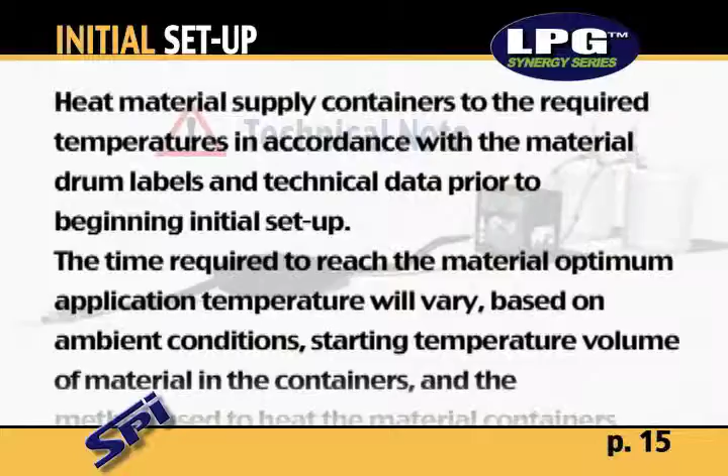Heat material supply containers to the required temperatures in accordance with the material drum labels and technical data prior to beginning initial setup. The time required to reach the material optimum application temperature will vary based on ambient conditions, starting temperature, volume of material in the containers, and the method used to heat the material containers.

In Chapter 2, we will cover: locate LPG unit, connect component transfer hoses, connect spray hose, connect lock and load spray gun, power application, bleed air from fluid system, purge spray hose.

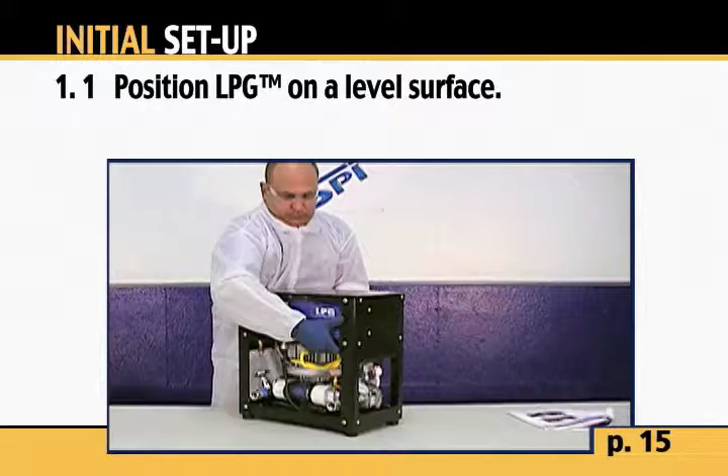Locate LPG unit. Position LPG on a level surface. Do not expose LPG to moisture.

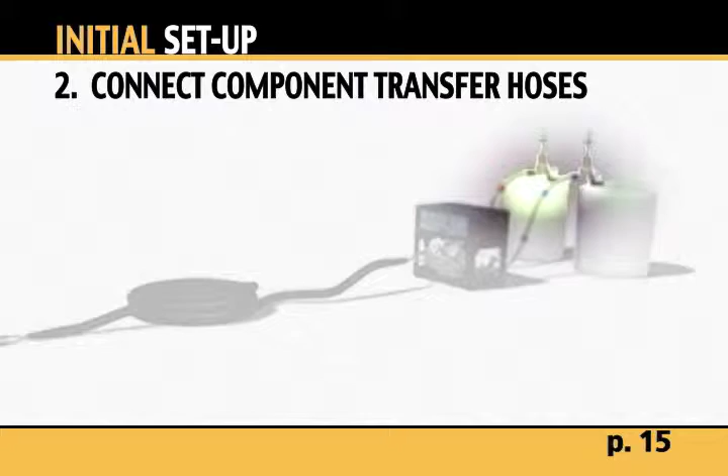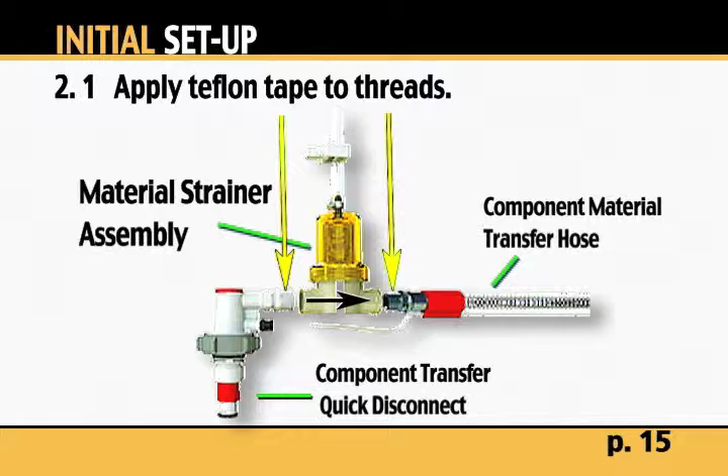Connect component transfer hoses. Apply Teflon tape to threads of material strainer assembly here and here. Ensure the flow direction arrow on material strainer assembly is pointing towards the proportioner.

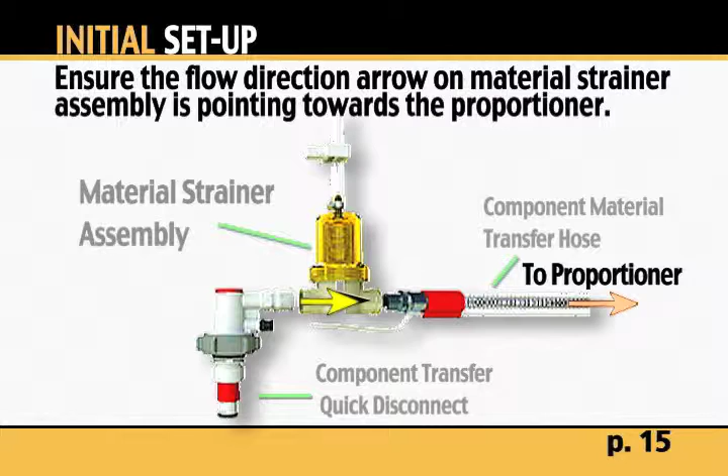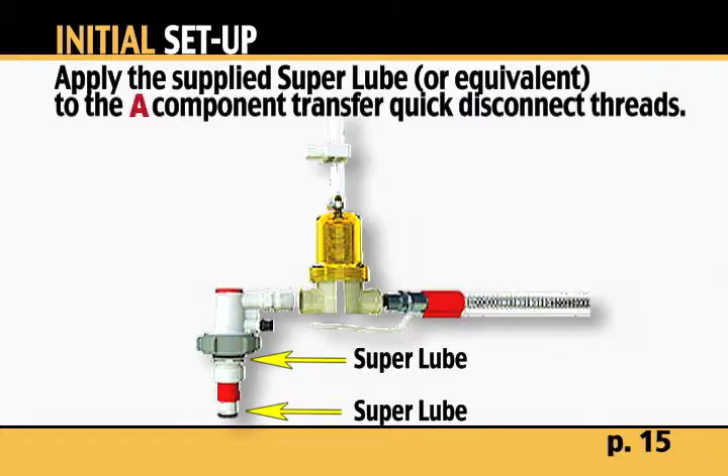Apply the supplied Super Lube or equivalent to the A component transfer quick disconnect threads here and here. Connect the A component material strainer assembly to the A component transfer hose and material drum transfer quick disconnect unit.

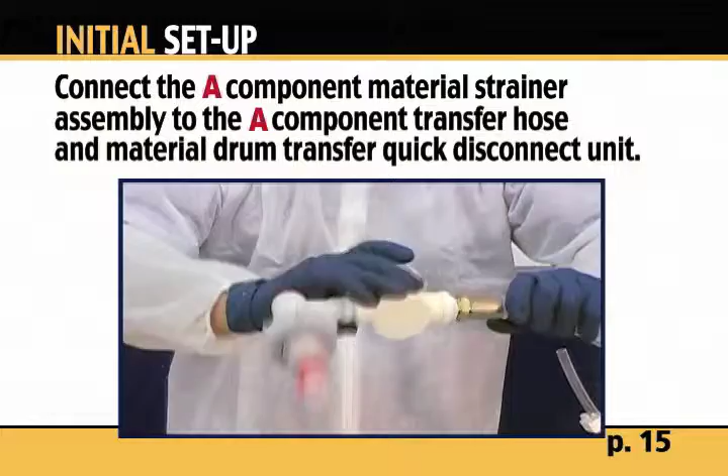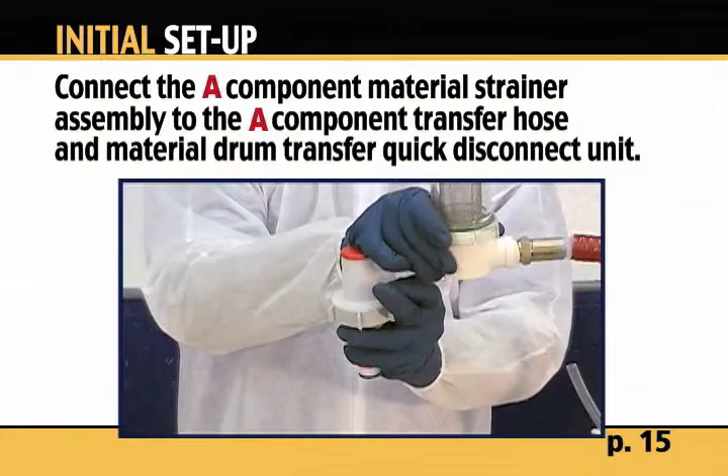Connect the A component transfer hose to the A component proportioning pump inlet fitting.

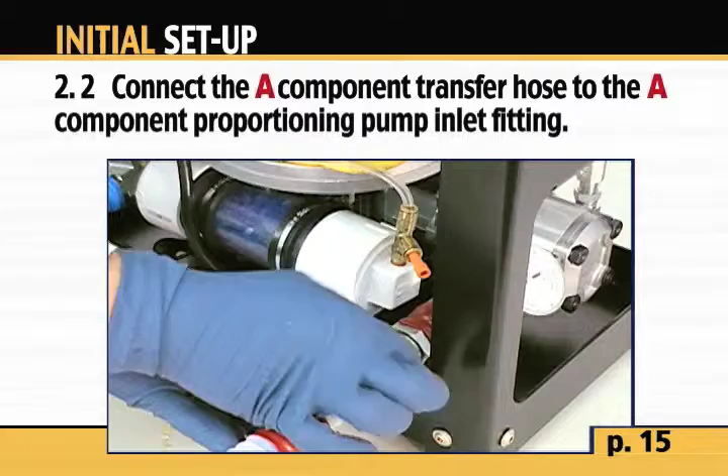Connect the A component air lines to air dryer outlets.

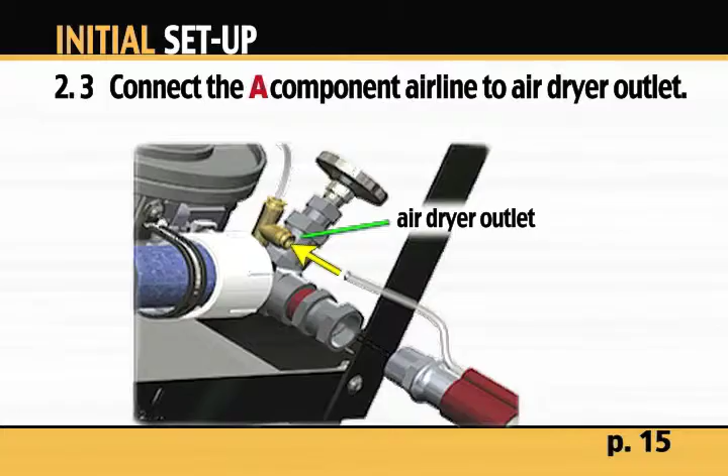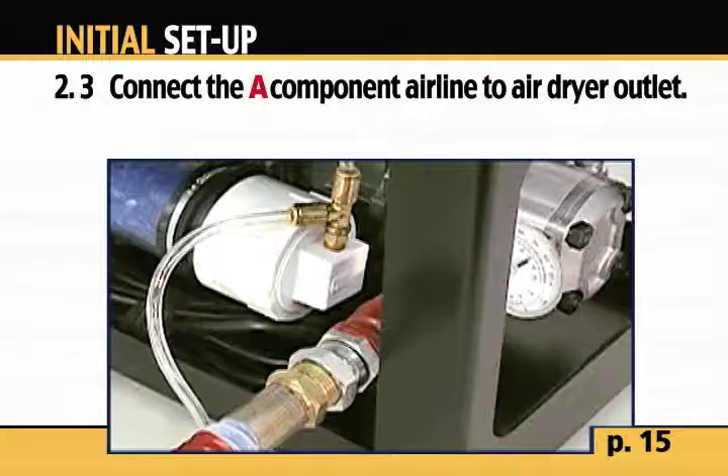Placement of the A and B component supply containers must not cause any sharp bends or excessive pressure on the component transfer hose assembly. The component transfer hose must be as straight as possible with a slight downward angle towards the LPG inlets.

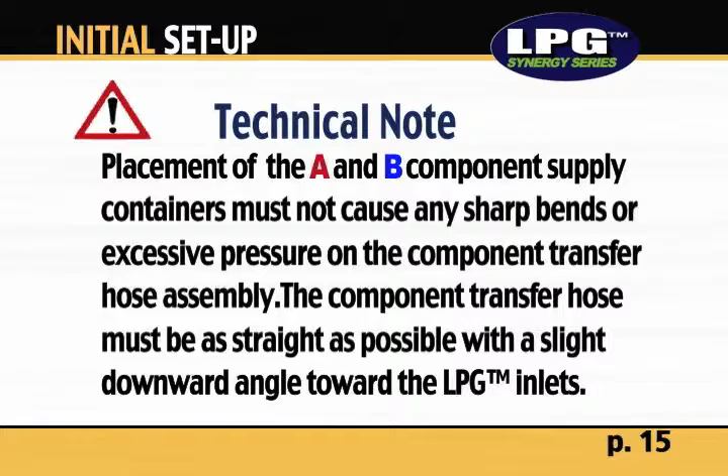Locate the A component container near the LPG A component transfer quick disconnect.

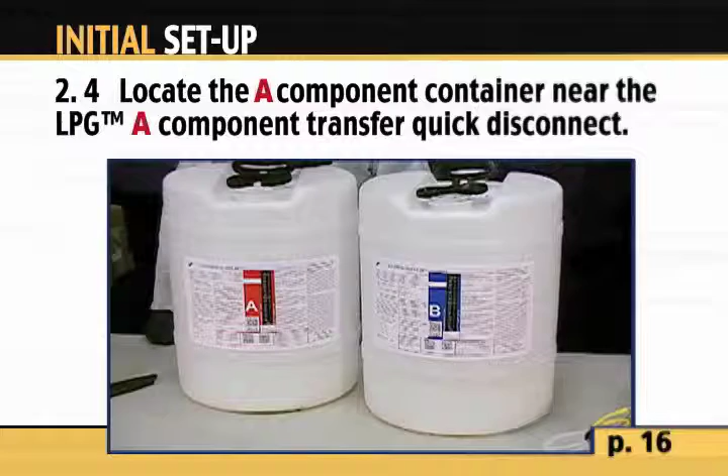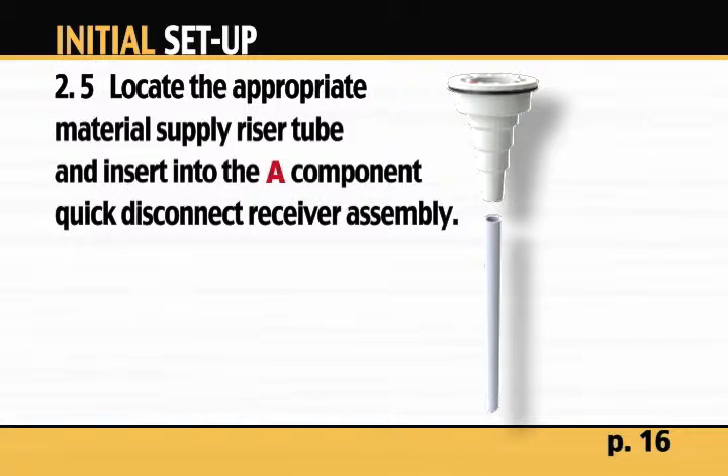Locate the appropriate material supply riser tube and insert into the A component quick disconnect receiver assembly. Install the supply riser tube that is the correct length, depending on which LPG container you will be using, 5, 15, or 55 gallons.

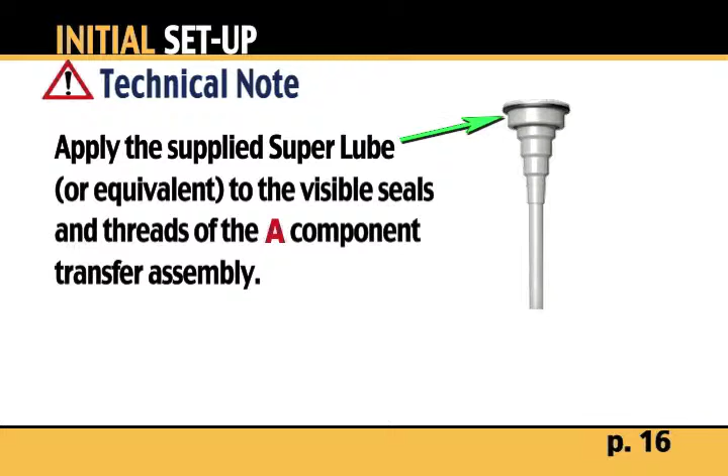Apply the supplied Super Lube or equivalent to the visible seals and threads of the A component transfer assembly. Insert the quick disconnect receiver riser tube assembly into the material container.

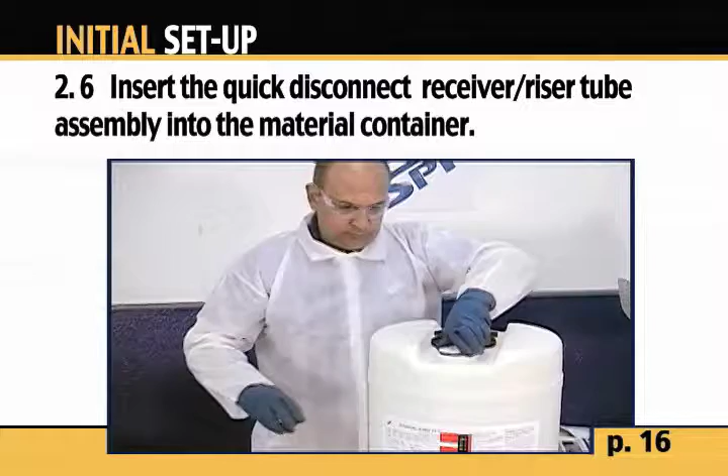Remove A component container storage plug.

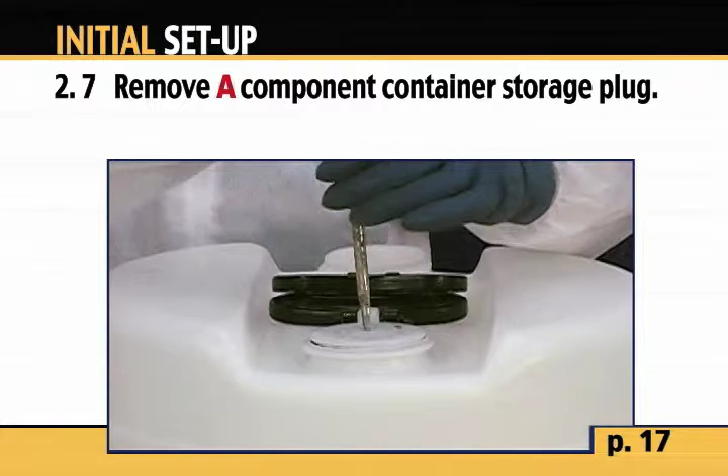The bottom of each LPG fluid strainer air trap must be positioned at a minimum of 4 inches above the top of the LPG proportioning pump inlet.

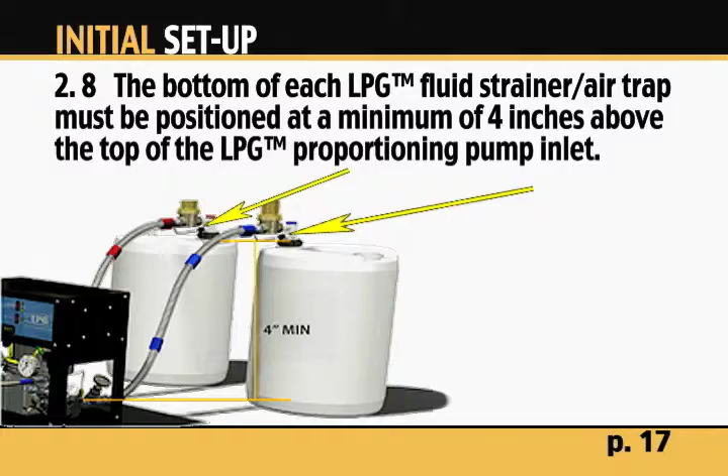Thread the A component transfer quick disconnect into the A component receiver assembly, aligning keys with keyways until the connector is hand tight.

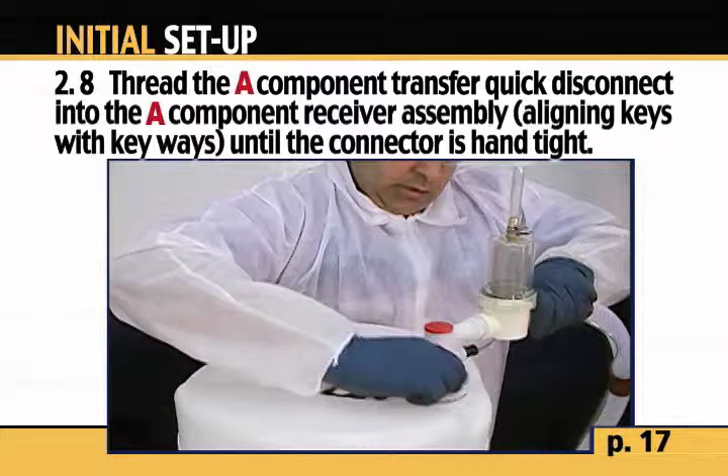Over-tightening the transfer quick disconnect can cause an air leak, which will not allow the transfer supply system to properly pressurize as designed.

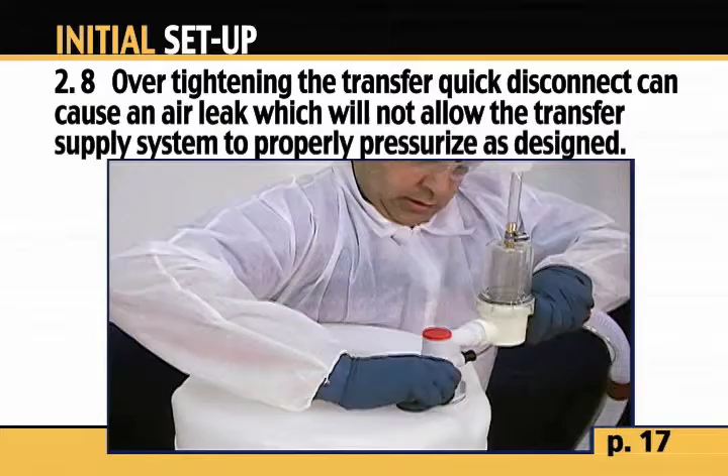Repeat steps 2.1 through 2.8 for the B component transfer hose assembly.

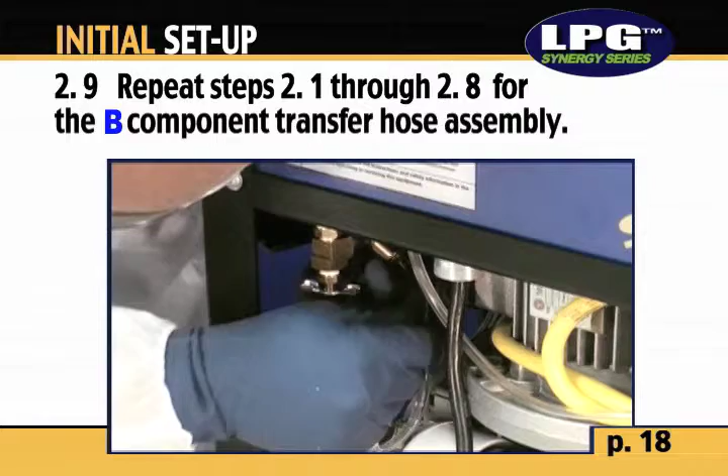Connect spray hose. Connect the A component pressure hose to A component proportioning pump outlet.

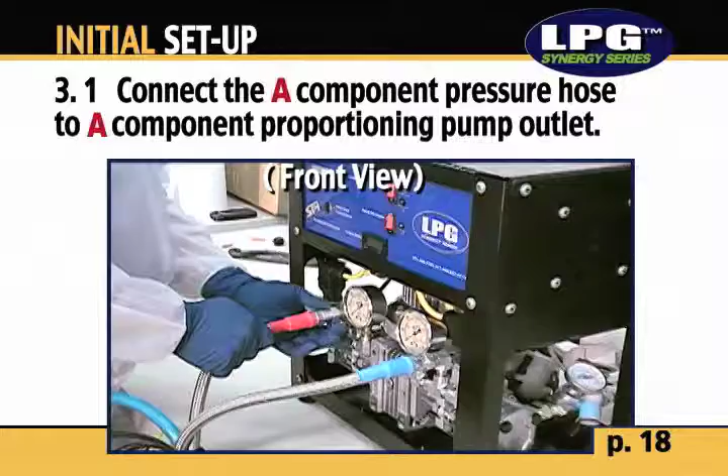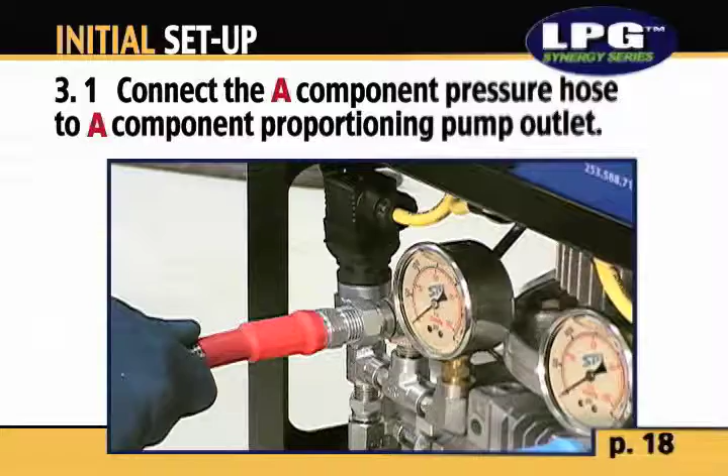Connect the B component pressure hose to the B component pump outlet.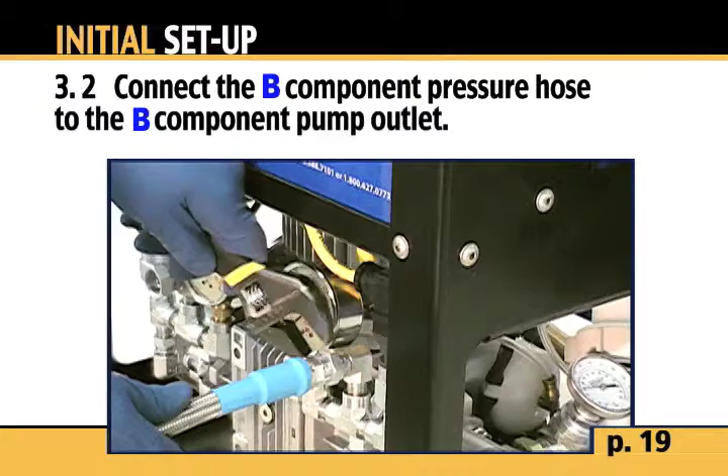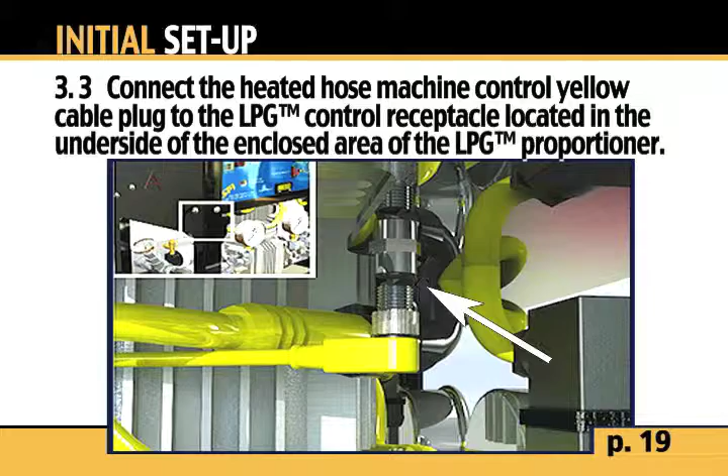Connect the heated hose machine control yellow cable plug to the LPG control receptacle located in the underside of the enclosed area of the LPG proportioner. Align key with keyway and thread plug into receptacle.

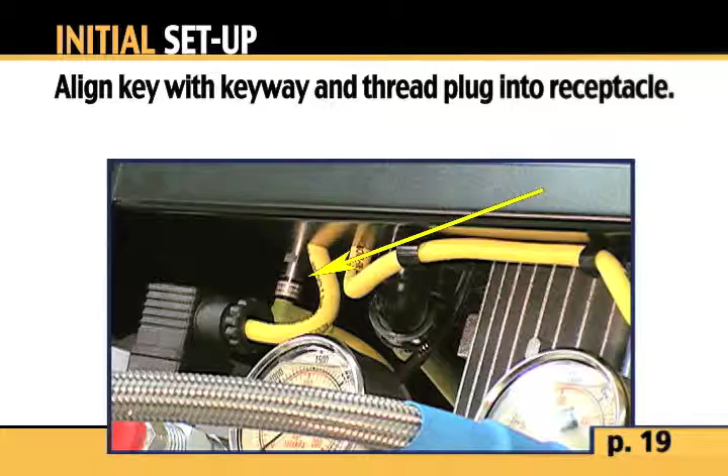Connect lock and load spray gun. Open LPG lock and load gun box and remove the lock and load gun.

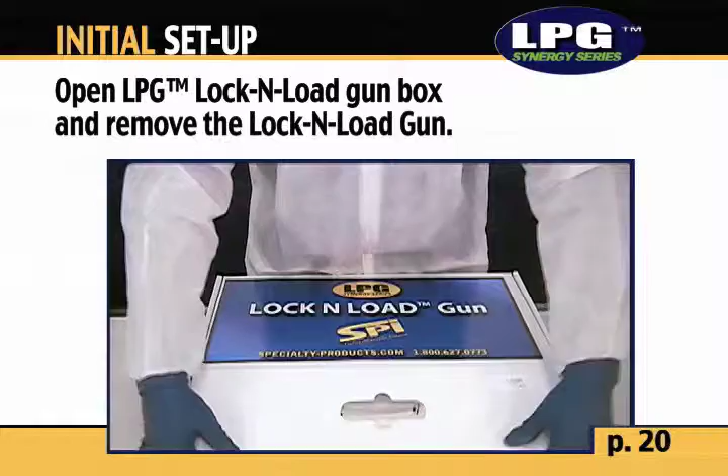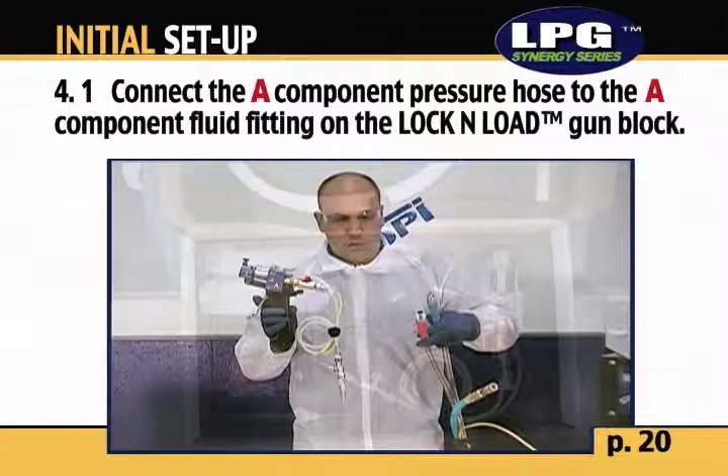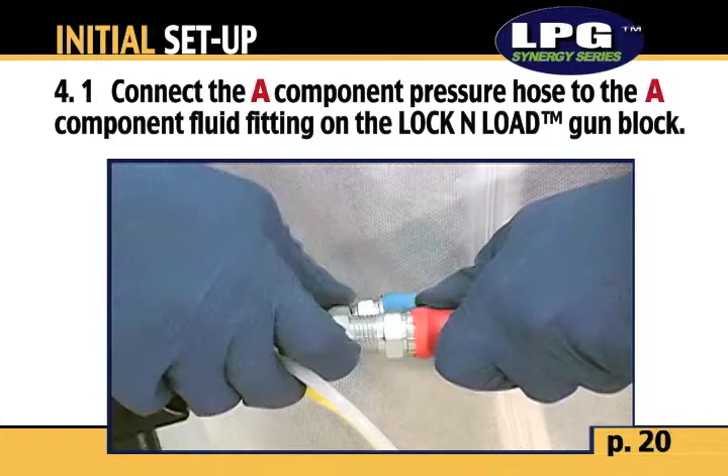Connect the A component pressure hose to the A component fluid fitting on the lock and load gun block. Do not kink spray hose or coil tighter than a 3-foot diameter.

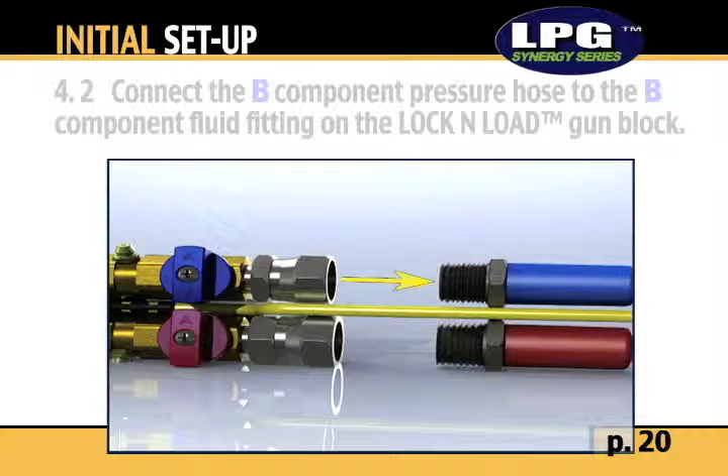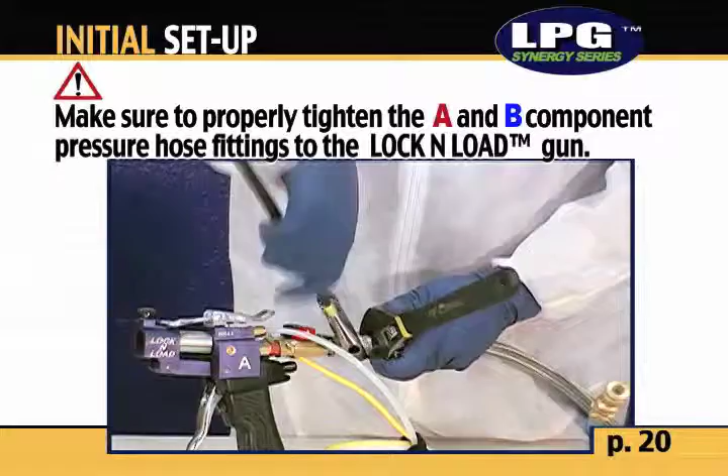Connect the B component pressure hose to the B component fluid fitting on the lock and load gun block. Make sure to properly tighten the A and B component pressure hose fittings to the lock and load gun.

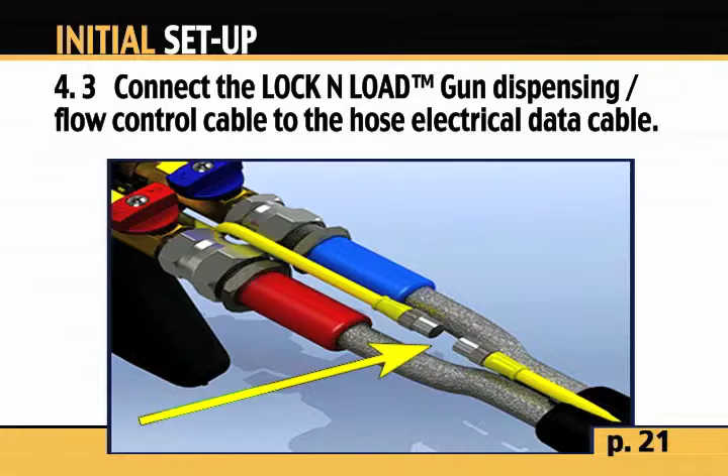Connect the LOCK N LOAD gun dispensing flow control cable to the hose electrical data cable.

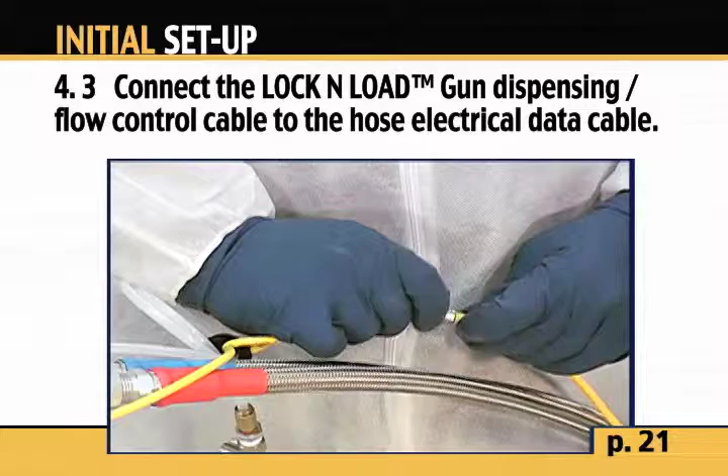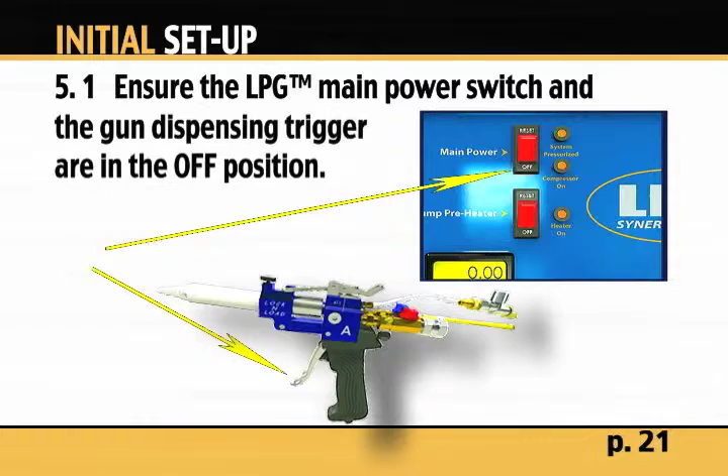Power application. Ensure the LPG main power switch and the gun dispensing trigger are in the off position.

Connect the LPG power cord to any standard NEMA 5-15 or 5-20 receptacle. The LPG uses a standard NEMA 5 3-wire plug rated a maximum of 125 volts.

Under certain operating conditions, the higher amperage NEMA 5-20 receptacle may be required to attain the desired product flow rate. The LPG does not require any additional configuration for operating from a 20-amp circuit.

The LPG has a self-contained low-pressure air compressor. This compressor supplies 5 psi of moisture-free air to the A and B component containers to supply the LPG proportioning pumps with material. The compressor will begin to build pressure automatically when main power is turned on.

The air compressor will shut off once 5 psi of air pressure is in the material containers and continue to cycle to maintain pressure.

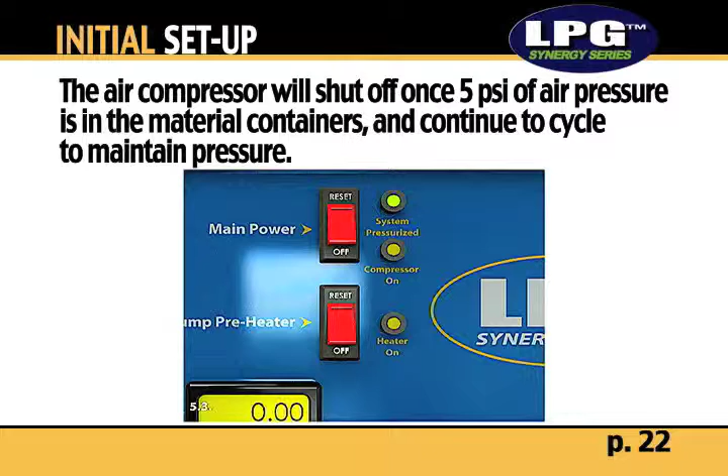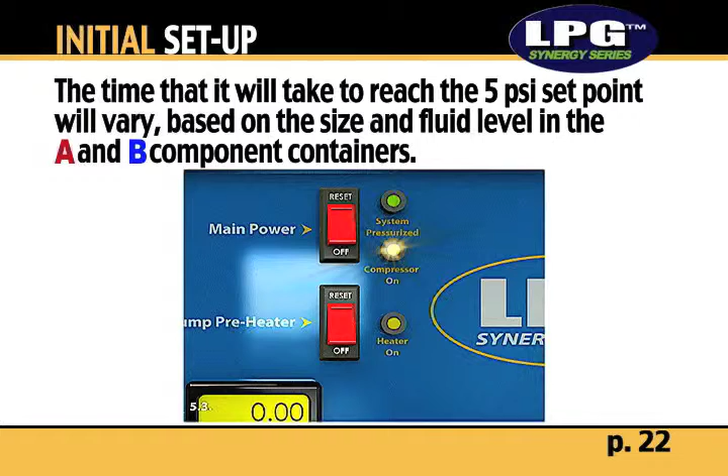The time that it will take to reach the 5 psi set point will vary based on the size and fluid level in the A and B component containers. Proceed once the air compressor has started its cycle on-off.

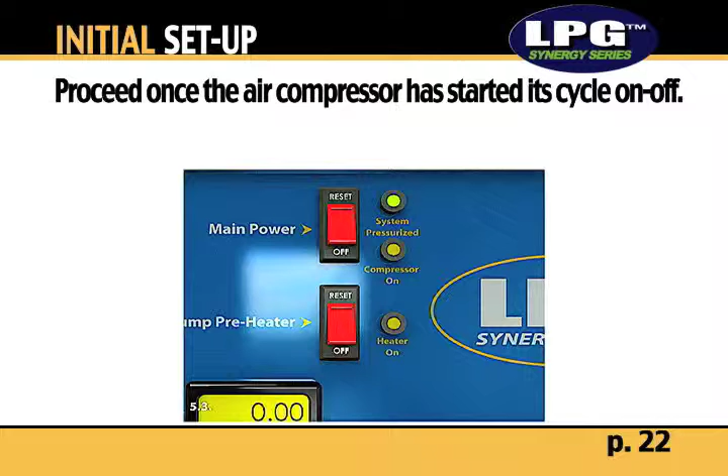Bleed air from fluid system. If necessary, run fluid agitator in the B component container prior to proceeding. Reference the Synergy Series product technical data sheet and container label for the product you are dispensing for further instructions.

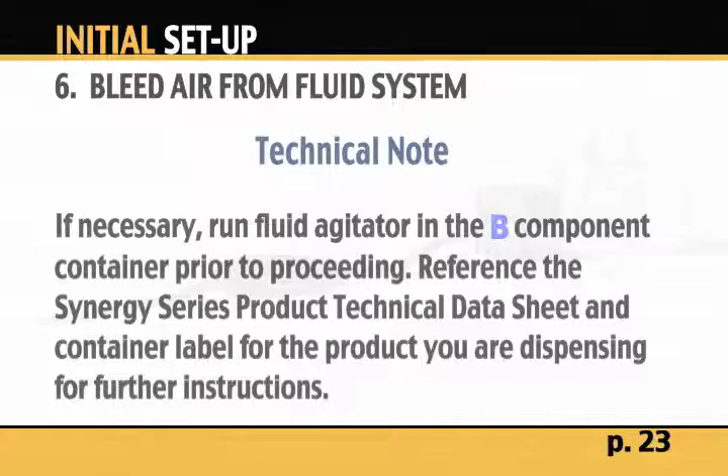Open the air release crimp valve on the A component fluid strainer air trap. Observe as the fluid begins to rise in the fluid strainer air trap and close crimp valve when fluid is 1 to 1.5 inches from the top of the clear strainer housing.

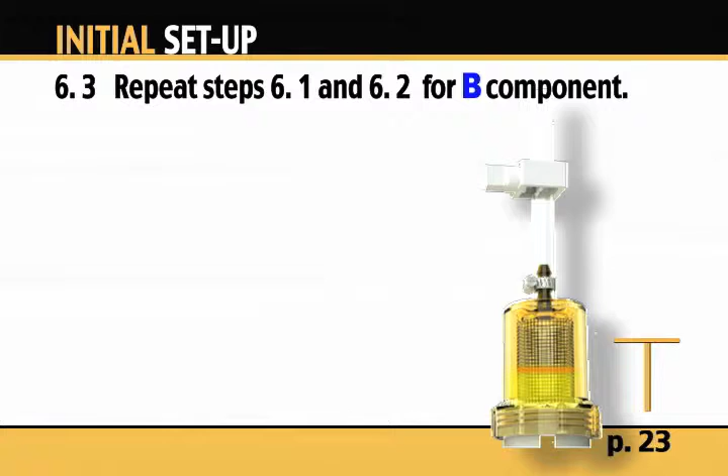Repeat steps 6.1 and 6.2 for B component. It is imperative for proper application that each A and B component side has air bled from each fluid strainer air trap. Visually monitor to ensure each fluid housing remains full of product during operation.

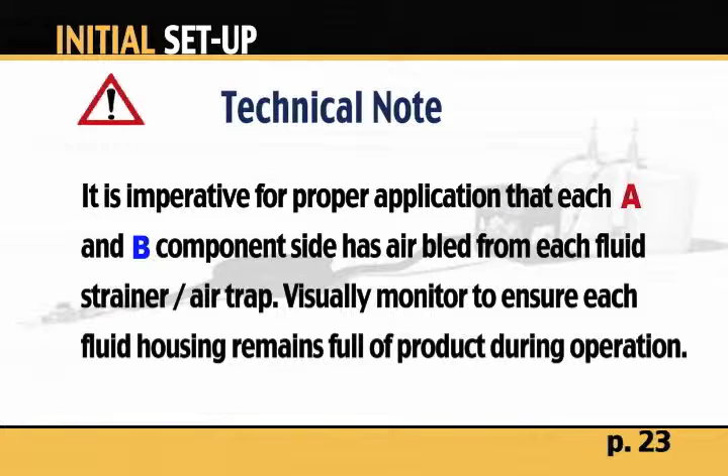Purge spray hose. Position lock and load gun over a properly grounded waste container.

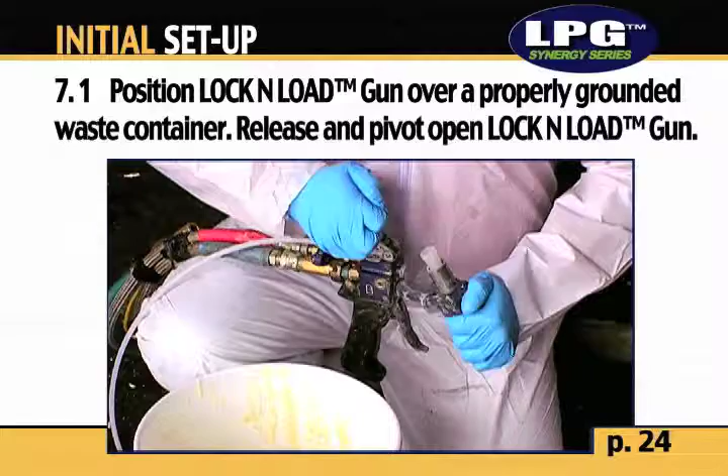Release and pivot open lock and load gun. Release mixer retainer latch and pivot mixer shroud block away from fluid block.

Ensure the A and B component manual valves are in the open position. Arrows pointing to gun and hose are open, and perpendicular is closed.

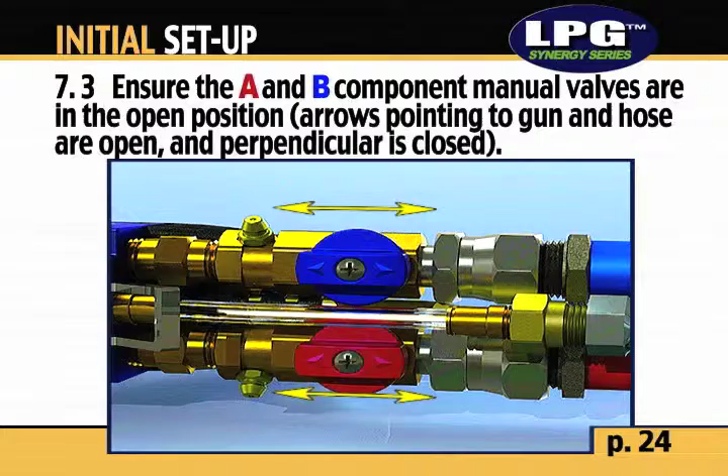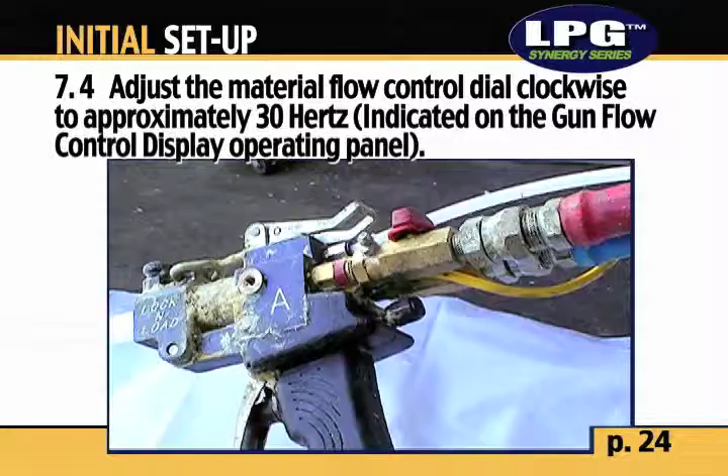Adjust the material flow control dial clockwise to approximately 30 Hz, indicated on the gun flow control display operating panel.

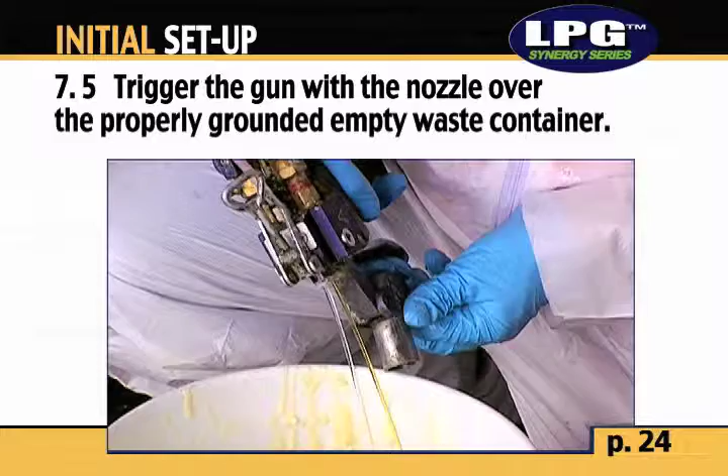Trigger the gun with the nozzle over the properly grounded empty waste container. Once there is a steady flow of both A and B components with no air bubbles, de-trigger the gun.

Turn both fluid manual valves to the closed position.

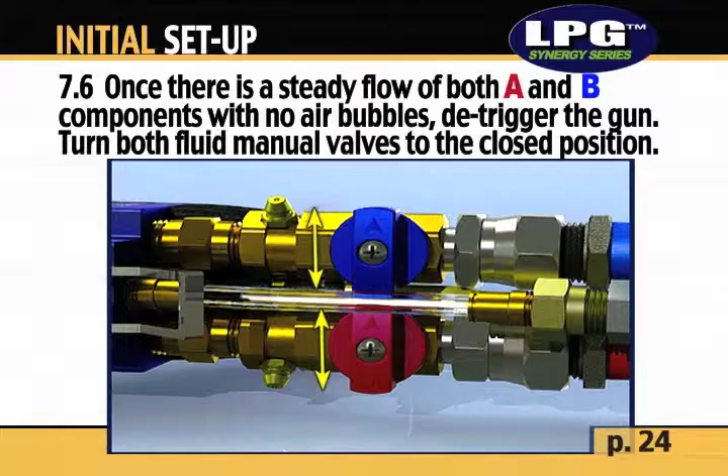Let's review what we covered in Chapter 2. Locate LPG unit. Connect component transfer hoses. Connect spray hose. Connect lock and load spray gun. Power application. Bleed air from fluid system. Purge spray hose.